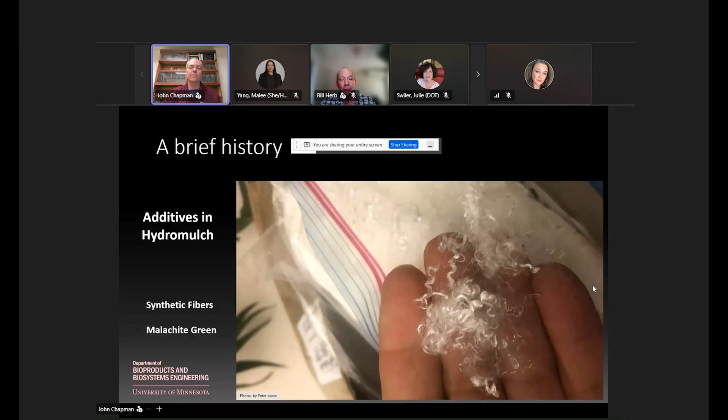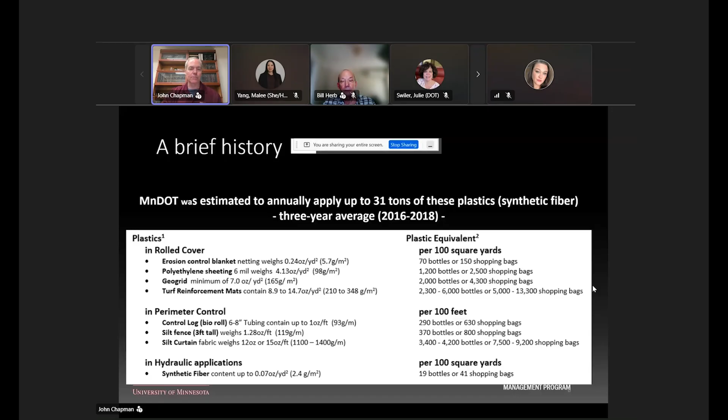If you go to the standard test methodologies, there are test methods to look at the longevity of these plastic elements, and historically that's what some of the testing for erosion control products relied on. So if we take the plastics out entirely - some of the small fibers blended into the hydromulch products - if we just don't use those, it really leaves us with a pretty big void in our test methodologies to evaluate. This is a summary of Peter Leete's estimate of the amount of plastics going into the environment because of these products, maybe 31 tons of plastics annually.

That leads us to what we've been looking at for the last 5 to 6 years. This has been a long project - it's kind of like watching paint dry. We had to put these products out in the field and naturally let them weather, then compare that to some other test methods. So this was a very long-term project.

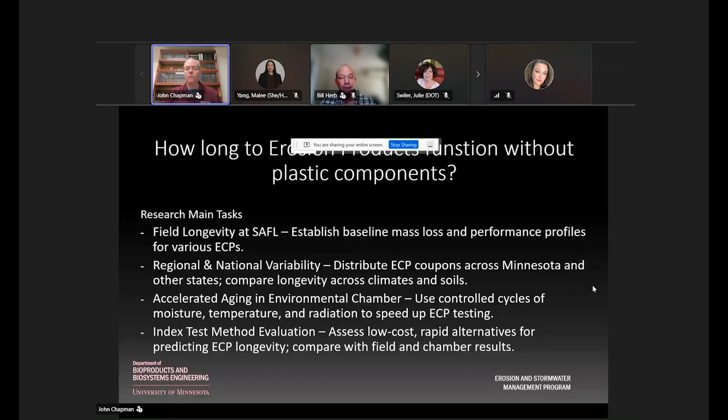We started with some test plots outside that sat for 5 years. We compared the national climate variability to make sure that test plot location was comparable to other spots in Minnesota and the nation. Then we looked at how we could accelerate that aging with some sort of standard test method, using an environmental chamber or other degradation techniques. That's essentially what this project was.

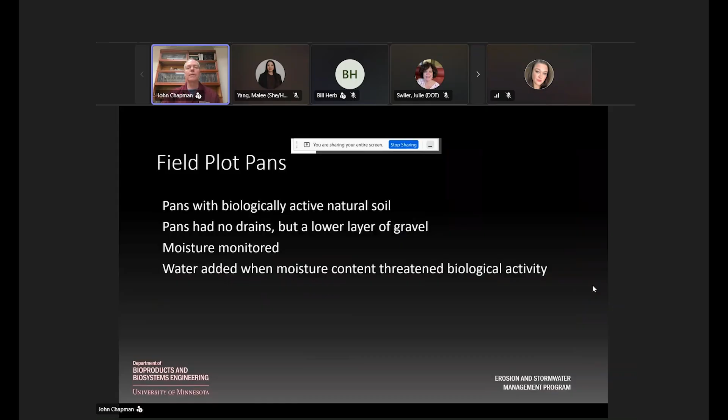Each of these trays had natural soils so we could see the biological activity, and we used some plastic meshes just as separators and protectors - they weren't structural elements of the products. The one thing people often ask about this setup is how the moisture content was managed. We used monitoring for that, kept track of it over time, and added moisture if it was too dry. We never had a situation where it was too wet.

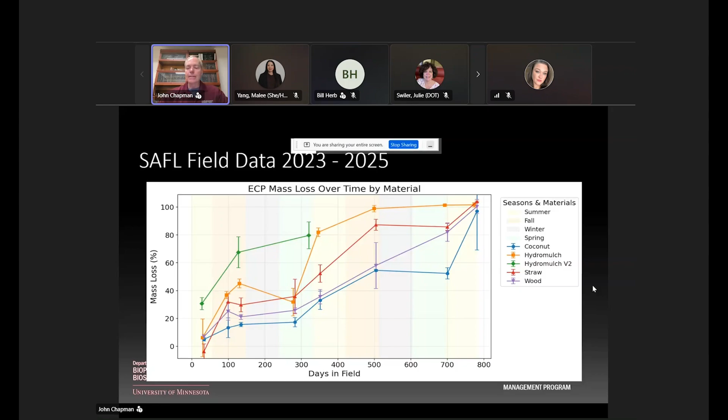This plot is from Minnesota, so we have color stripes vertically that indicate if it's summer, fall, or winter. That can be simplified if we cut out all the winter freezing conditions. If we go back a slide, you see the lines go up and down or flatten out, and that's the freezing conditions—there's not much degradation in winter. So if we just look at the growing days, this plot simplifies down to this.

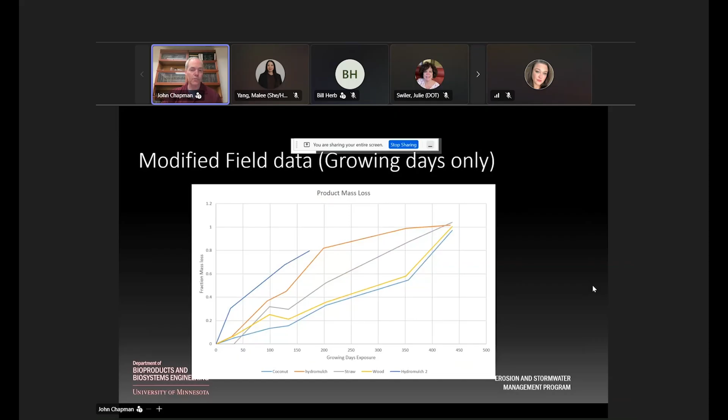So this is our natural condition. It really answers the initial question of how long these products remain in the field. So that was the first question answered.

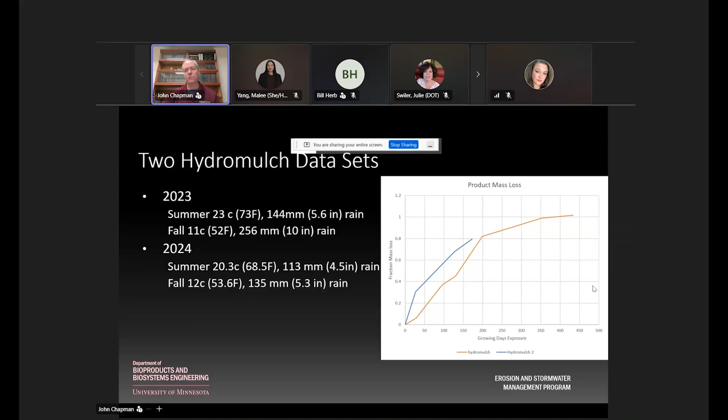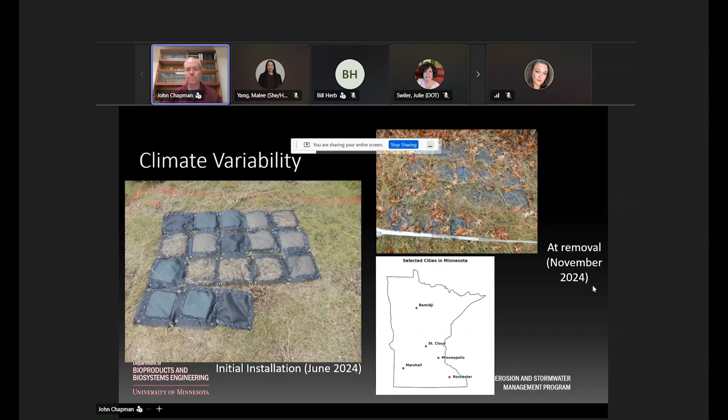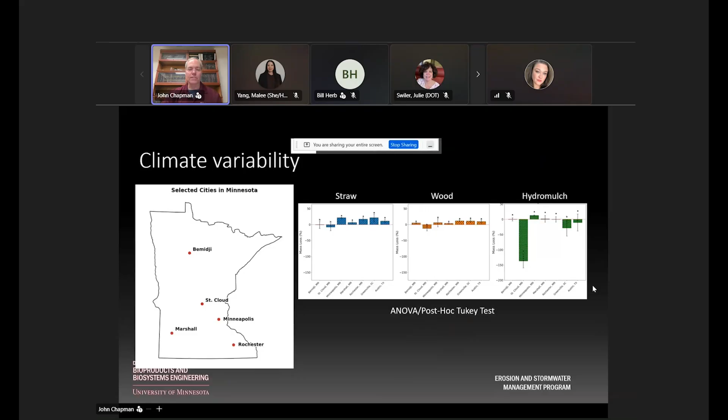I'd mentioned this variability—these lines are a single line, but there's really a range. I think those hydromulch, these two sets of hydromulch, can give a feel for that wider band of variability in that range. The bottom line here is we had no statistical differences between our products placed out between Rochester, Bemidji, even South Carolina and Texas. So this is just some of the plots from that. More or less our data at Minneapolis is applicable to all of Minnesota.

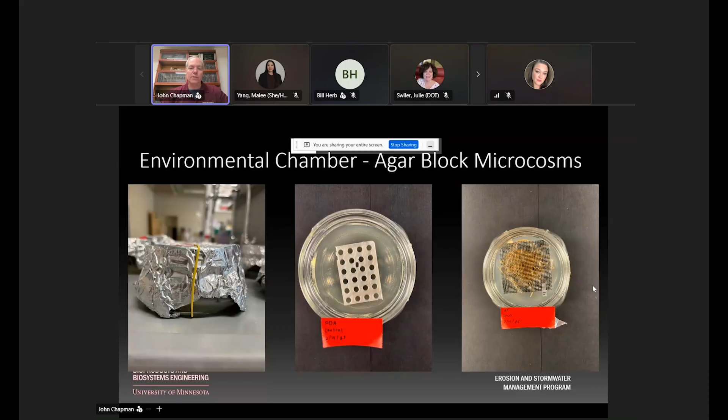The next step was this environmental chamber, and we placed material into a climate-controlled system where we could control the humidity. We tried several different test methods on this, and the one that really worked best was using a fungus placed onto the product. If it were placed in this environmental chamber, we could replicate decay in about 28 days, which would be the same as about 6 months of decay. So that's really what we narrowed in on eventually as the most promising test method.

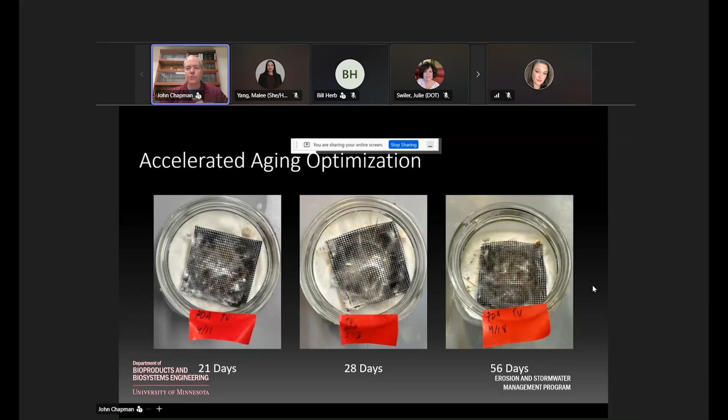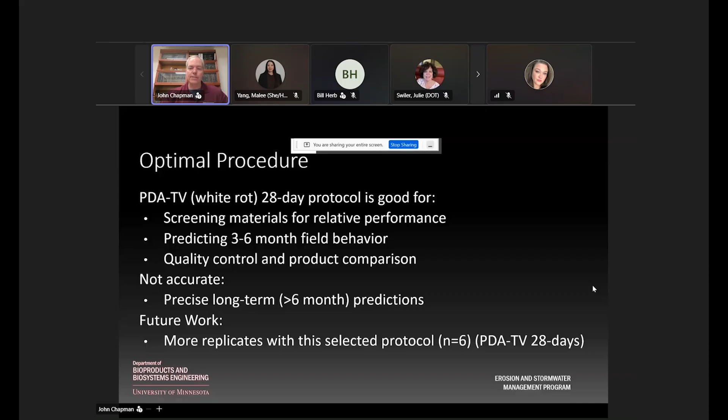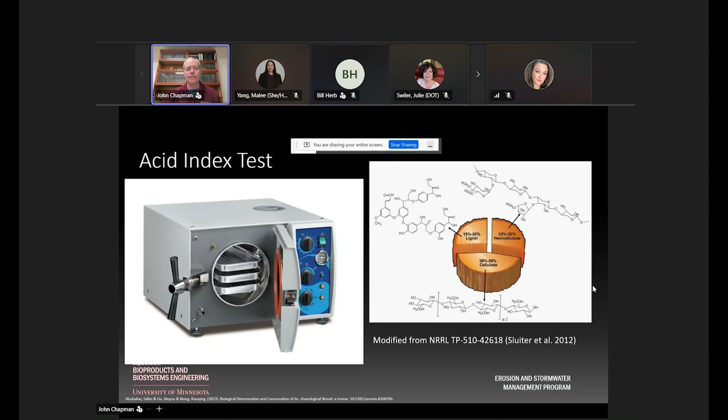So using what's called a white rot 28-day protocol seems very promising for a standard test method that could be done in about a month of time—you don't have to wait years. We played around with some other test methods too, like an acid test in an autoclave that can give a result in about 3 hours. That has some promise.

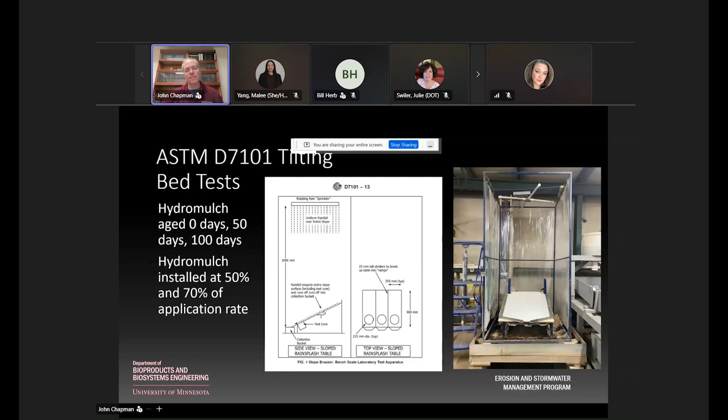The last one I'll mention, for hydromulch—this seems like a really good test method, but it only works with hydromulch. Basically, if we look at the mass loss, if hydromulch loses 50% of its mass, you can actually apply it in a test machine at 50% of the application rate, and we found that pretty closely represented our observed performance. So that's potentially another test method for hydromulch: apply it at thinner application rates and then run it through other testing protocols.

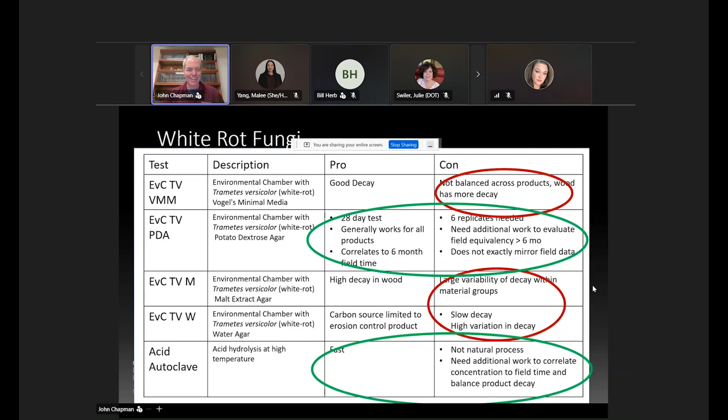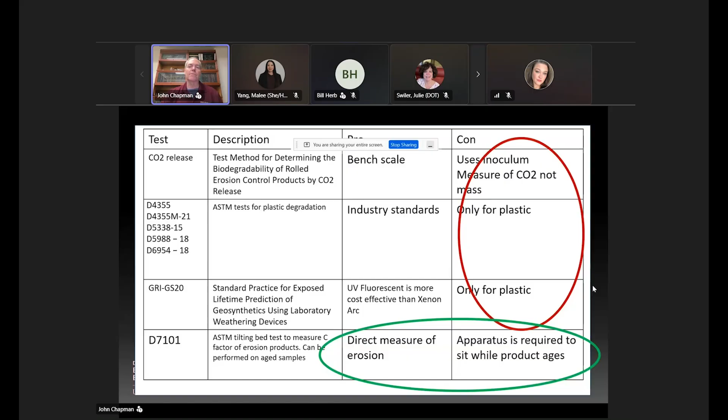So this is just some slides showing all of the different test methods that we went through. This white rot 28-day test was the most promising for replicating natural conditions, although the acid autoclave and this ASTM D7101 with a lesser application rate don't really have any natural decay aspect to them, but they do show promise as other test methods.

So I'll skip over these last couple slides. These were the hydromulch slides looking at the ASTM D7101.

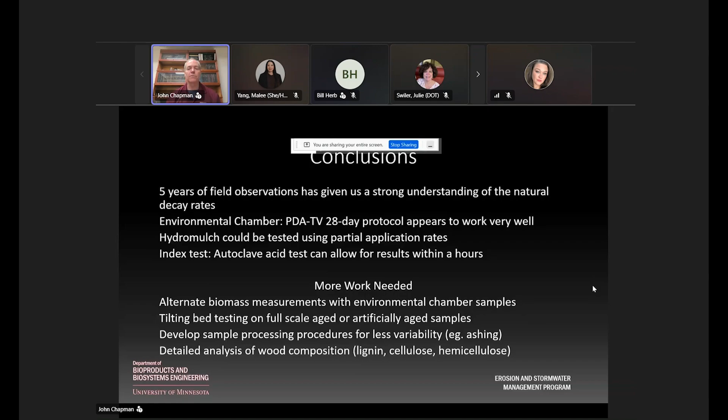We do see the need for more work on this, looking at fine tuning some of these test methods and improving the variability on them. And I think with that, I'd like to acknowledge the technical advisory panel and our undergraduates that helped us out, and some of the grad students.

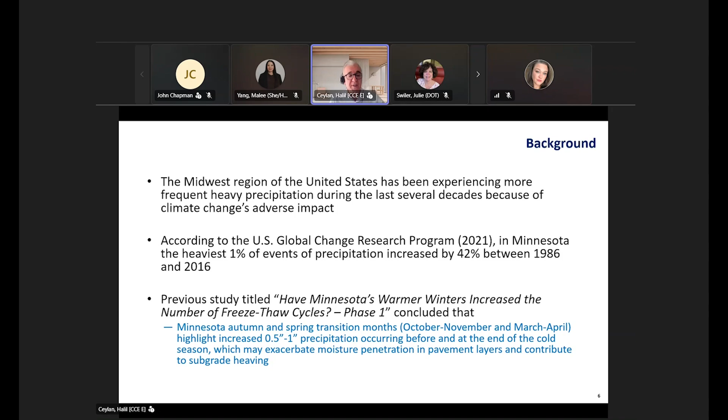And if you look at what's actually happening since the 1980s, that's also a statistically significant change. All these conditions exacerbate moisture penetration in the pavement foundation layers and contribute to issues with the subgrade and base layers and all that.

Water is life on our planet, but for us geotechnical and pavement engineers, civil infrastructure engineers, water is something that we constantly struggle with, and we need to keep it out of pavement foundations. We need to quantify the impact of additional moisture, and that's what this study was about.

As stated in the problem statement, precipitation changes could significantly impact the subsurface flow conditions and moisture content. The higher the availability of moisture, the lower the strength and modulus of these layers, and there are more issues, and it reduces the life of our critical infrastructure systems.

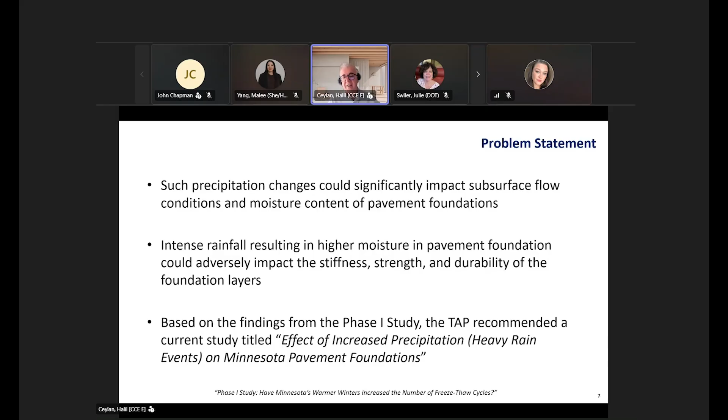Intense rainfall resulting from these high moisture events adversely impacts the engineering properties - stiffness, strength, and durability. Based on the findings from the phase 1 study, TAP recommended initiating this phase 2 study that I'm presenting right now.

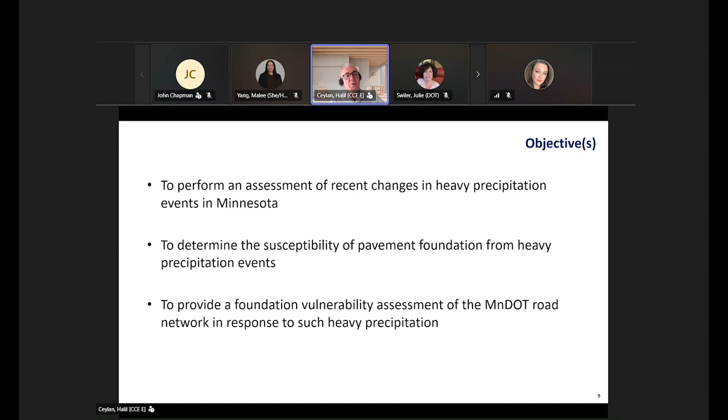The main objectives were to perform an assessment of recent changes in precipitation events in Minnesota, and determine the susceptibility of pavement foundations from heavy precipitation events. We also came up with a foundation vulnerability assessment for the MnDOT road network system in response to such events. These were the core bullets included in the scope of our study.

Starting with the data analysis related to heavy precipitation events, I just wanted to show these graphs. We have actually a very long record of this precipitation data in our region, starting from the 1900s. But after 1980, there's actually a statistically significant shift.

As you can see, precipitation events have increased, and the quantities have increased as well - 1 inch and more. This continues, and you can see the data here as an example for Wright County, but we actually have this data for the entire state, for all the regions.

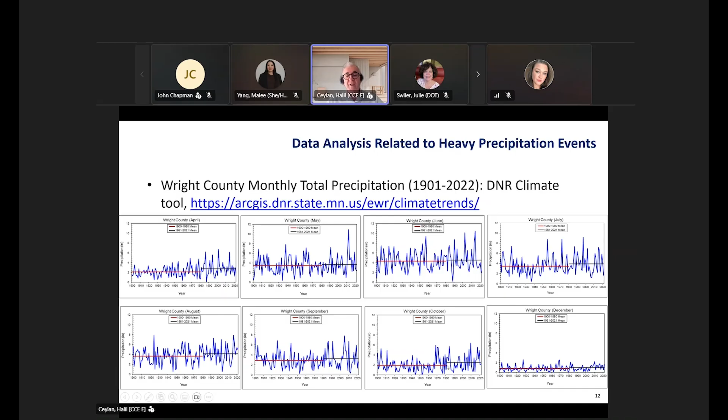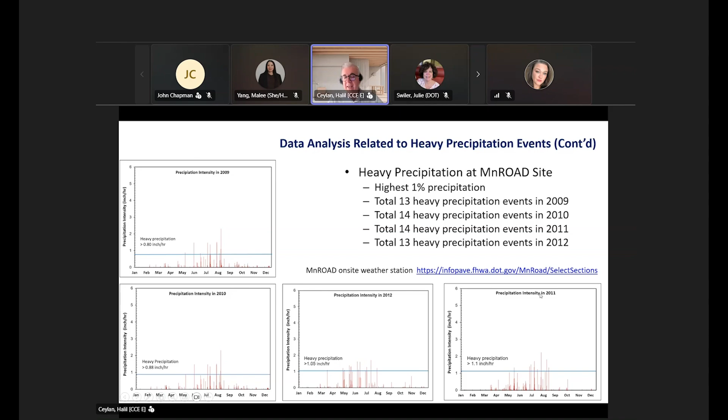This is the struggle that we have. For example, in October, there's a really statistically significant shift and increase in precipitation events. We also looked into heavy precipitation events, the highest 1% precipitation, and you can see the numbers anywhere from 13, 14 here, and 9, 10, 11, and 12 around 2010, for one of the counties we want to present.

So then we needed to come up with a scientific, mathematics-based model - which is called a mechanistic-based model - for predicting these events and the susceptibility of pavement foundations, and how these heavy precipitation events are impacting the engineering properties. We came up with a two-step modeling approach.

In the first step, we are actually quantifying the change in moisture due to heavy rainfall events. As you can see here, there are a number of equations listed. In the second step, once we quantify the additional moisture availability, we are quantifying its adverse impact on the pavement foundation layers - the decrease in strength and modulus of these layers.

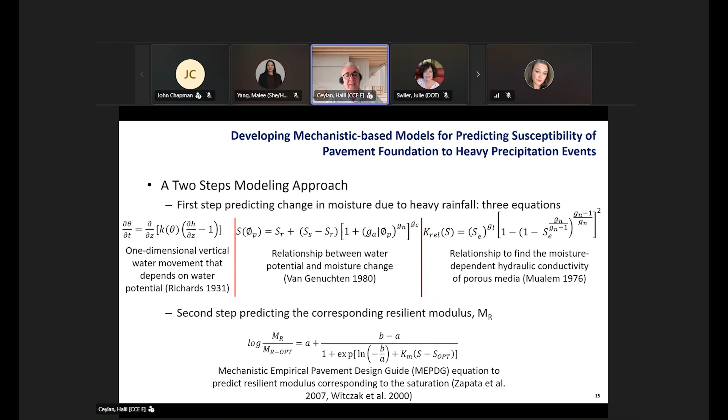These are well-known colleagues, Drs. Zapata and the late Dr. Witczak of our field, and we utilized the best available equations in the literature.

Then we needed a tool to numerically model all these events, and Plaxis 3D hydraulic modeling is a fantastic tool for us geotechnical and pavement engineers dealing with these kinds of precipitation and moisture issues. There are excellent models included in these tools.

Finite element is one of the best tools available for us engineers. It's a numerical analysis tool. We can quantify pretty much anything and everything using this methodology.

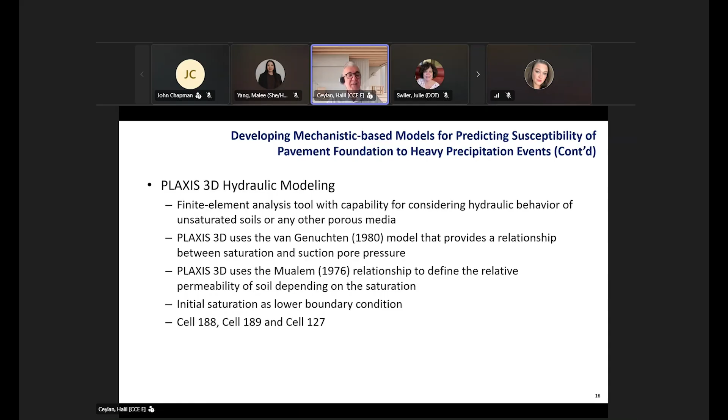We looked into the saturations as lower boundary conditions, and then we utilized the data coming from the MnDOT test sections. This is one of the most well-studied road sections in the country, in the world, going back several decades, and we utilized the available data from these test cells.

Then we looked into the soil water characteristic curve, and then selected the granular and asphalt concrete sections.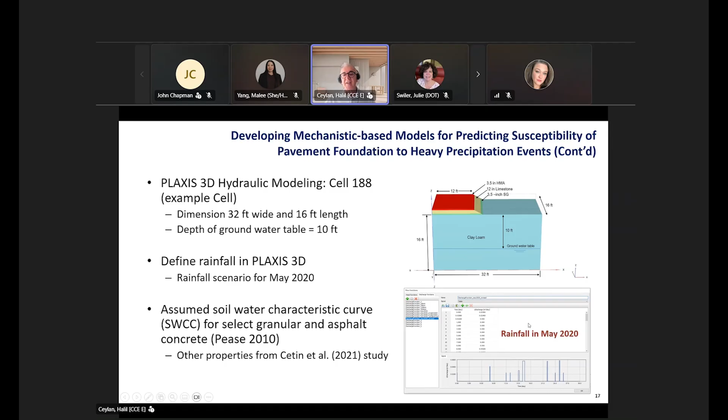They model the engineering properties using finite element analysis. As the name indicates, the area is divided into a finite number of elements, and numerical approximation techniques have been utilized. You can see the limestone 5-inch thickness and limestone 14-inch thickness layers, and in the outputs, the saturation percentages and the impact on these pavement foundation layers as precipitation events have been included in the models.

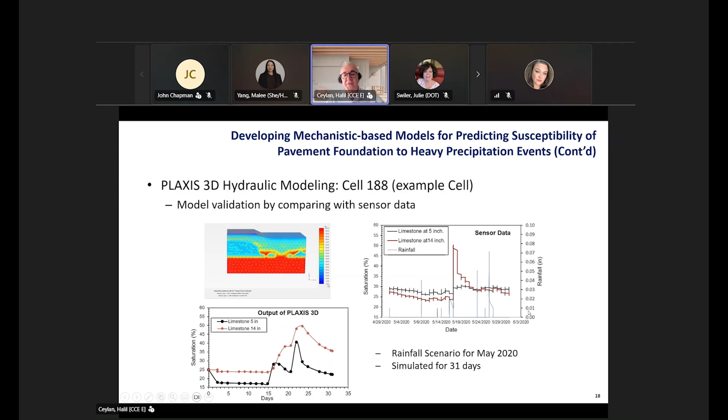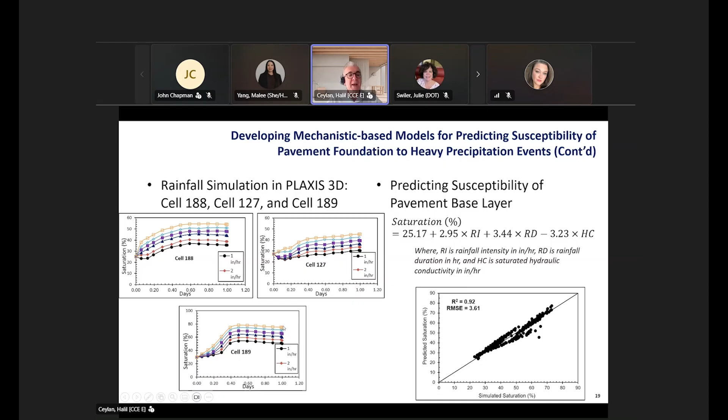These are great tools for modeling what's actually happening in real life. You can see rainfall simulations in Plaxis 3D, with very good correlations achieved between simulated saturation and predicted saturation. These models tell us that in all these cells, we are able to quantify the impact of increased precipitation events and the adverse impact on the pavement foundation layers. These are great tools.

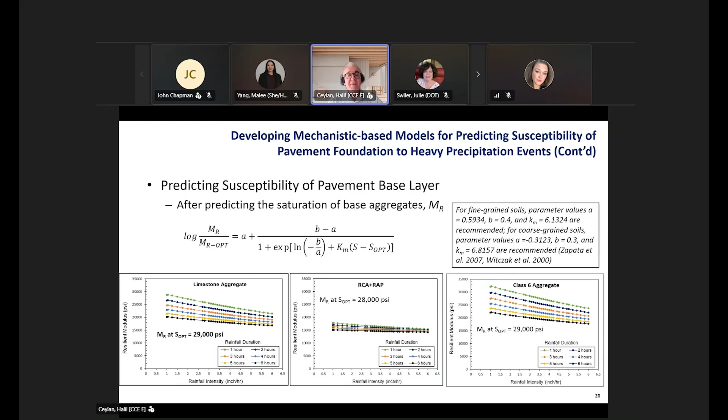MR, the resilient modulus, is the overall indicator of the condition and engineering properties of these layers. As precipitation events go up, we see a decrease in the resilient modulus. As this decreases, the layers become more vulnerable under repeated traffic loads and climatic loadings, and the life expectancy of these layers goes down. This is a great example of how we are quantifying the impact of heavy precipitation events on pavement foundations.

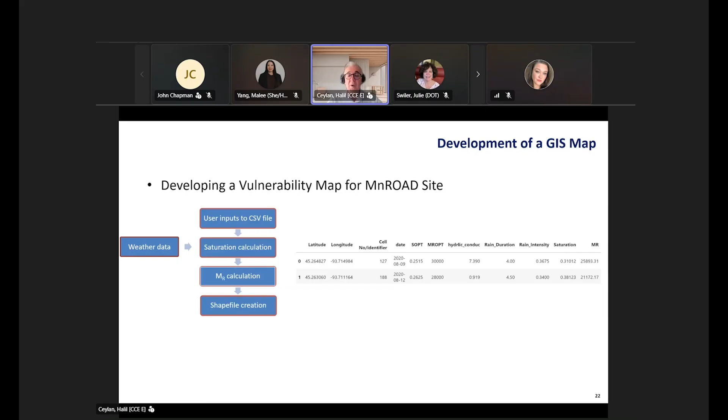We looked into vulnerability maps for the MnROAD test sections. The data was obtained as a CSV file with saturation calculations as mentioned. Now we're quantifying the resilient modulus and creating shapefiles, taking the weather data and looking into the optimum resilient modulus, rain intensity levels, and saturation, so we can quantify how these are impacting the layers.

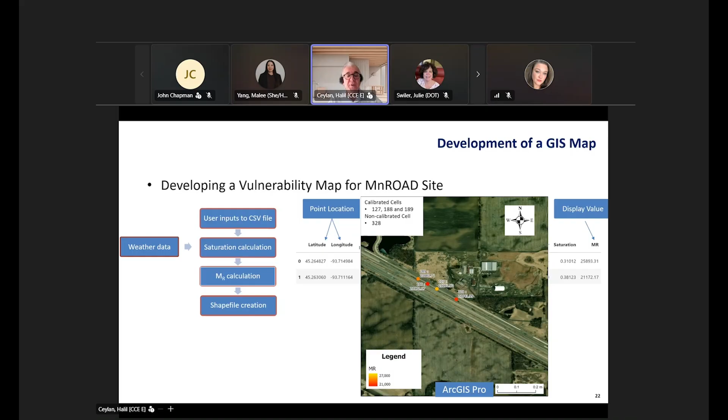As you can see, in certain cases, depending on the saturation events, the resilient modulus went down from 27,000 to 21,000. Red indicates a more problematic area, with lower modulus and lower strength. These areas become more vulnerable under repeated traffic and climatic loadings, and everything is shown here on ArcGIS maps.

We looked into three cells, among the most well-studied road sections in the world at MnROAD, including low volume road sections. They confirmed trends in moisture change with early peaks in March and summer peaks due to heavy precipitation. All these heavy rainfall scenarios were nicely simulated with one of the best tools available for us engineers and researchers, Plaxis 3D pavement models, and they indicated a decrease in the modulus and strength of these layers.

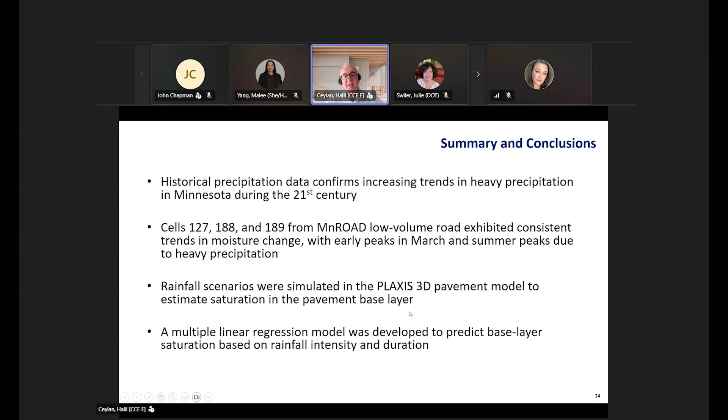A multiple linear regression model was developed with very high R-square prediction accuracy to predict base layer saturation based on heavy precipitation events. After these findings, we were able to use these equations in the Pavement ME, mechanistic-empirical pavement design guide equations, the best ones available in the literature, estimating at different saturation levels how we can quantify the susceptibility in the pavement foundation layers.

Recycled material sections and others have been studied, and we've developed models to create GIS-based pavement foundation vulnerability maps for these selected areas. All these tools and codes have been shared with the agency's technical advisory panel so they can continue to utilize them in the future.

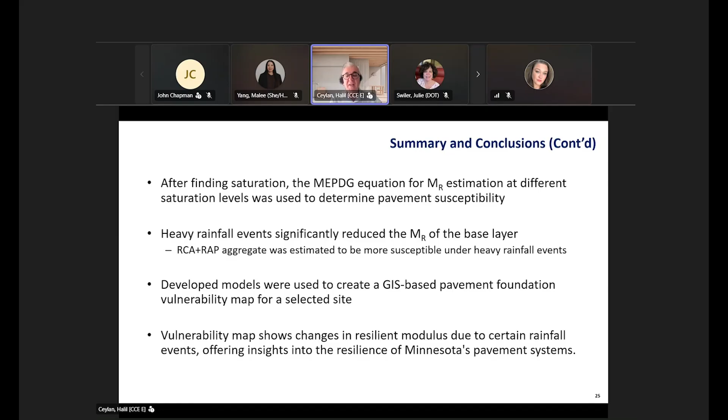The vulnerability maps show the changes in resilient modulus due to these rainfall events, offering insights into the resilience of Minnesota's pavement foundation systems. A limitation is that a single type of subgrade soil and asphalt concrete was used, but it still shows the roadmap for how these studies can be conducted and quantified.

It may not be representative of soil properties for the entire state, but it gives you a roadmap for how different soils can be considered in a similar way. Also, the limited number of sub-base variations may not account for the full range of subbase materials.

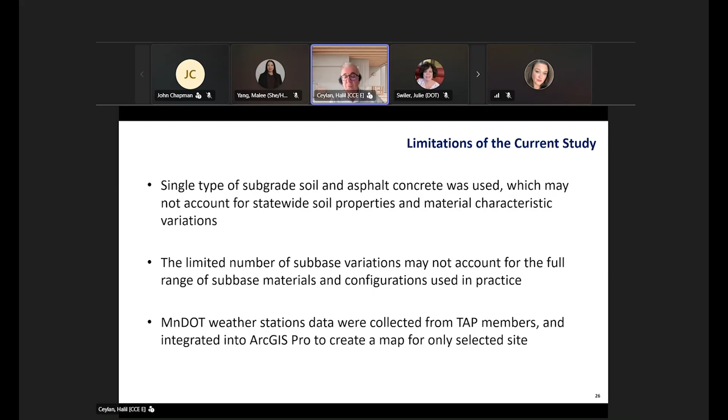We utilized MnDOT weather stations collected from the TAP members and integrated into the ArcGIS map, but only for selected sites. This was the best we could do with the availability of time and resources, so there are great opportunities for future studies.

We can consider statewide pavement structures to have a comprehensive understanding of models' applicability to improve the vulnerability map accuracies. We can consider diverse subgrade soils base and subbase types to account for variation in material properties. Given the dynamic nature of climate conditions, we can quantify the direct influence on pavement resilience and incorporate real-time weather station data into the models and maps. So those are all additional possibilities.

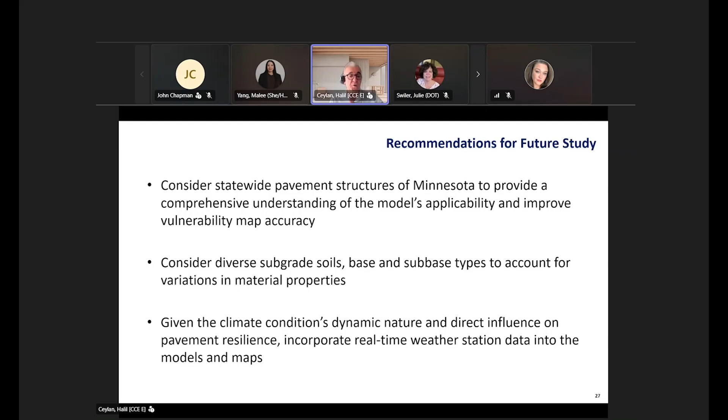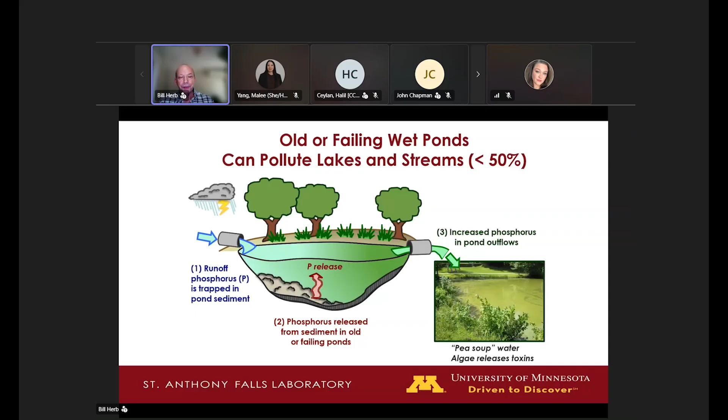We've had a number of projects looking at stormwater ponds. What we've learned is that a lot of these ponds are temperature stratified, or maybe even stratified from chloride. Many of them have low dissolved oxygen at the bottom because they're stratified, and because of this low oxygen, the sediment starts releasing phosphorus that it's supposed to be storing. That released phosphorus can then be exported from the pond during the next storm event.

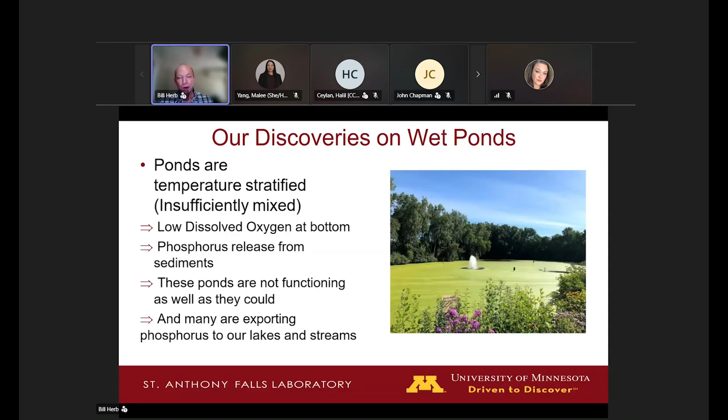So dissolved oxygen and stratification is a big deal in stormwater ponds, and we've been doing both field measurements and computer modeling to try and understand what's going on better.

In this project, we continued development of computer pond models to simulate temperature, dissolved oxygen, and phosphorus. We took additional field measurements from metro area stormwater ponds, including both water quality and sediment data, and then used the pond models to evaluate different remediation strategies to improve phosphorus retention in the ponds.

So the pond model looks something like this. It's a one-dimensional computer model. It incorporates many of the important processes, including surface heat transfer and wind mixing, the sediment dynamics of phosphorus and oxygen, and of course inflows and outflows.

The model we're working with was adapted from a one-dimensional lake model, and it only models vertical profiles. So it models the vertical profile of temperature, oxygen, phosphorus, etc., at the deep point in the pond, and then we assume that the pond is laterally well mixed. Because these are fairly small water bodies, that seems to be a pretty good assumption.

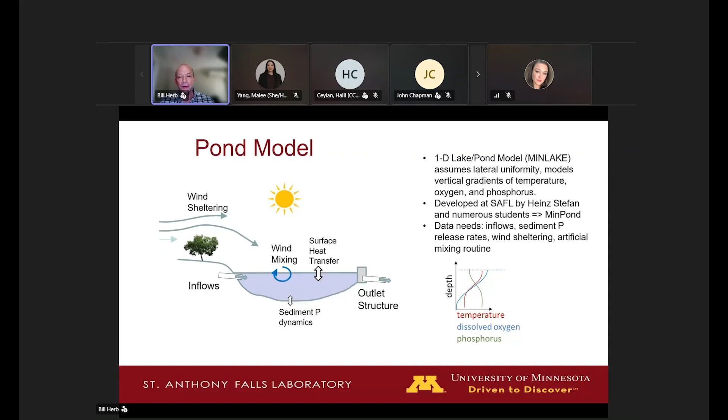However, one of the big challenges we had in this project is that a lot of ponds in this area are actually covered with duckweed, these little tiny floating macrophytes. And the duckweed really has a profound effect on the oxygen dynamics, the phosphorus dynamics, and even temperature. So I spent quite a bit of time in this project adding a duckweed model to the pond model, and had some success in modeling its growth and its impact on the ponds.

One thing that happens with duckweed is it tends to shade the pond, leading to cooler water temperatures. But another thing that happens is that duckweed tends to block surface oxygen transfer, so that ponds with duckweed tend to have lower oxygen, and that was a really important dynamic to capture in the model. So we made a lot of progress. There's probably a bit more work that could be done on modeling duckweed.

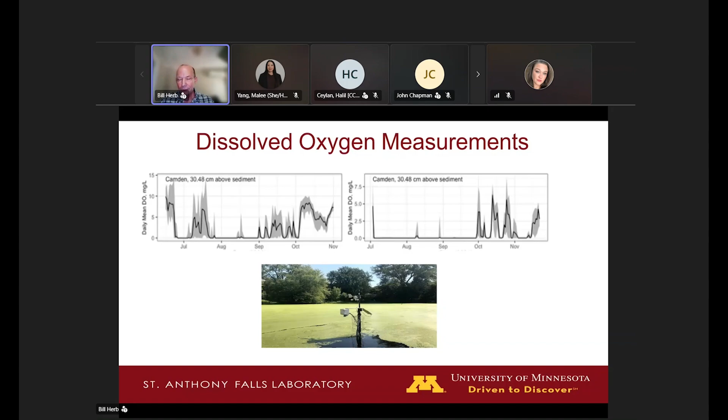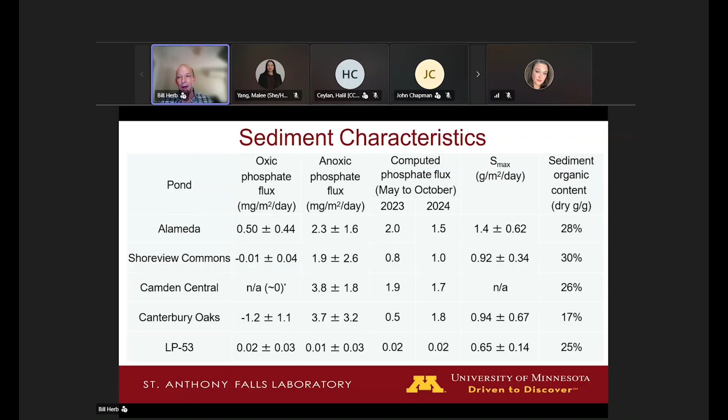I'll just throw up this slide. We won't go into this in detail, but this is just to demonstrate that we are taking a lot of sediment measurements in these ponds because it's very important. Basically, we take sediment samples from the ponds, bring them back to the St. Anthony Falls lab, and test them in controlled chambers to measure their oxygen consumption rate and their phosphorus release rate, along with some other parameters. This effort is led by Poornima Natarajan and is very important in these projects.

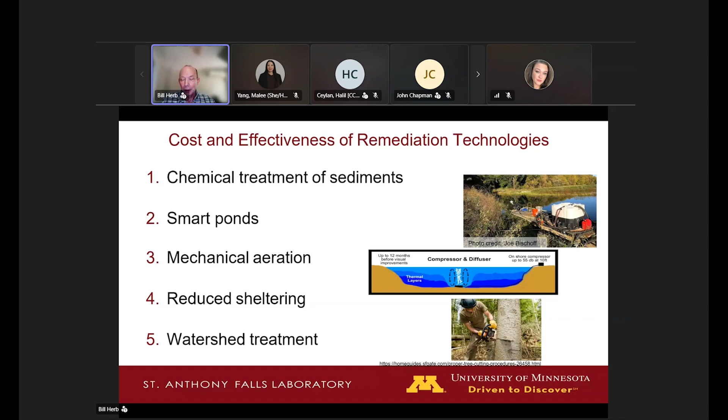So I'll talk a little bit about how we used the pond model to look at some different remediation strategies for ponds. In this project, we looked at 5: chemical treatment of sediments using either alum or iron filings to try and absorb some of the phosphorus; smart ponds, where we're actually controlling water level; mechanical aeration; we looked at what happens if you reduce wind sheltering in a pond, does that increase mixing and improve oxygen; and then we looked at a couple watershed treatments.

So starting with the chemical treatments, as I mentioned, we looked at both alum and iron filings. Both of these have the potential to tie up phosphorus in the sediment and prevent its release even under low oxygen conditions.

For iron filings, the model suggested that we could reduce phosphorus export from the ponds by 10 to 13%. Field data suggests that an iron filings treatment might last about 5 years. Alum treatments did a bit better, reducing phosphorus export from ponds by 11 to 24%. We're still kind of working on how long these treatments last. Hopefully it's at least on the order of 5 years again, but we're still looking at that.

I did some work looking at bubble aeration. Aeration is actually a pretty tricky thing to model, and particularly in the presence of duckweed, the results are a bit uncertain, but we found that we got very mixed results for adding aeration to ponds, where some ponds, like Alameda Pond and Camden, it did substantially reduce phosphorus export by increasing mixing and oxygen. Other ponds, it didn't really help very much. So we actually have another project that's going right now looking at aerators in particular, where we're installing aerators in a few ponds and measuring their impact.

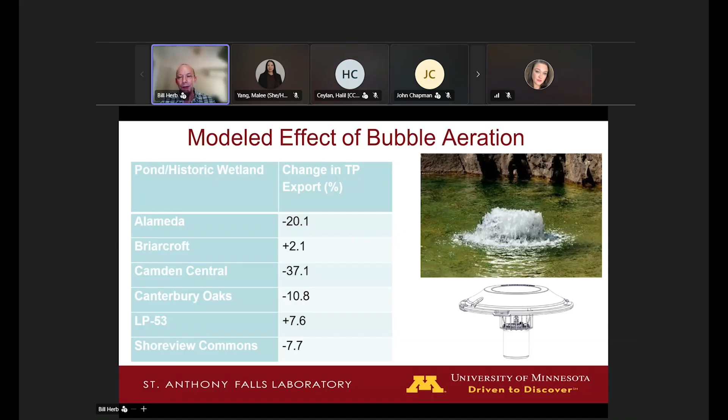We looked at 2 different types of watershed treatments. The first one was what happens to a stormwater pond if you reduce its volume input by 25%, using things like infiltration basins. That basically gave a corresponding reduction in phosphorus export. So a 25% reduction in volume gave a 21 to 33% reduction in phosphorus export. So that worked pretty well.

We also looked at a 25% reduction in the incoming phosphorus concentration, keeping runoff volume the same. That could be accomplished by doing some really good street sweeping, for example. So that 25% reduction in concentration led to a 2 to 22% reduction in phosphorus export. So that was also quite effective in many cases.

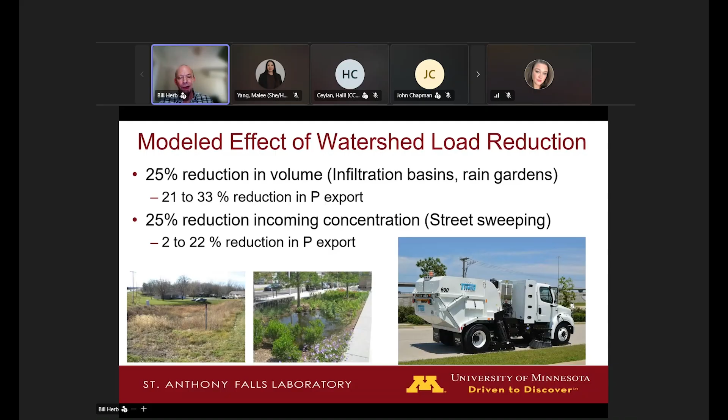In addition to using the pond model to model these phosphorus export reductions, we also did some costing analysis to try and estimate basically the cost per pound or per kilogram of phosphorus reduction.

In this analysis, the street sweeping came out the best. It had the lowest cost per pound or per kilogram of phosphorus reduction, but still on the order of several thousands of dollars per kilogram. You can kind of ignore the second to last column for LP53, that's an outlier. It was basically a big, deep pond with very low loading in the first place, so it's not representative, I think.

The chemical treatments came out kind of intermediate in cost, where iron filings and alum were both more expensive than street sweeping, but not unreasonable. The costs were a bit lower in some cases for alum, or for iron filings in other cases.

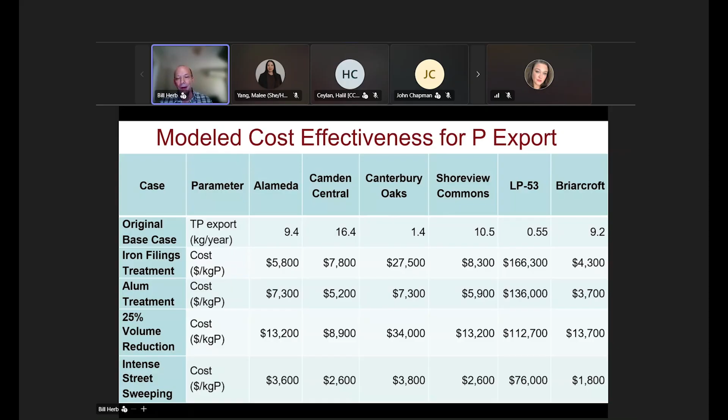And then finally, the most expensive thing was actually the volume reduction case, where installing infiltration basins and rain gardens ended up being quite costly. Although it did lead to a very significant reduction in phosphorus export from the ponds, it wasn't very cost effective in the analysis that we did.

So the recommendations that we came out with from this project: number one, doing intense street sweeping is probably the most cost-effective way to reduce phosphorus export from stormwater ponds. But when I say intense, that means it's not just twice a year, it's probably more like once a month at least. You really need to do a good job and use really good street sweepers to make this an effective strategy.

Chemical treatments of the sediments also looked pretty good in the analysis that we did. But obviously it's only an effective and cost-effective treatment when you have a lot of phosphorus released from the sediments in the first place. So it's important to do some sediment testing in ponds before you think about alum or iron filings treatments.

As I mentioned, aeration seemed to be kind of a mixed bag. There are different types of aeration, and they seem to have quite different effects depending on the level of stratification in the pond and the chemistry. So as I mentioned, we're doing some more work on that right now to get a better understanding of when aerators are effective.